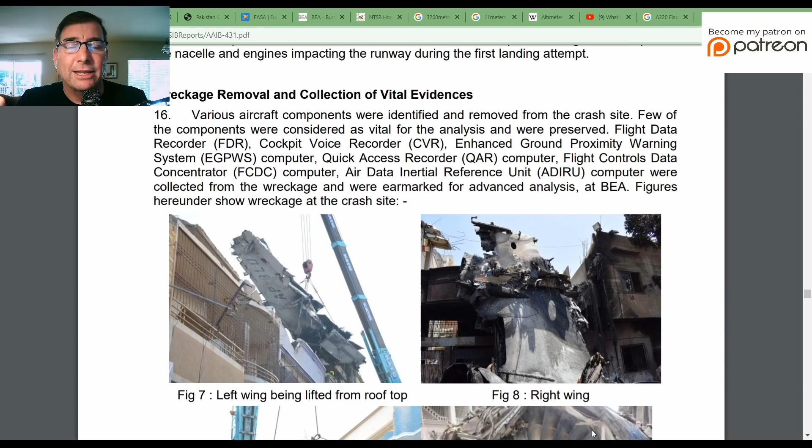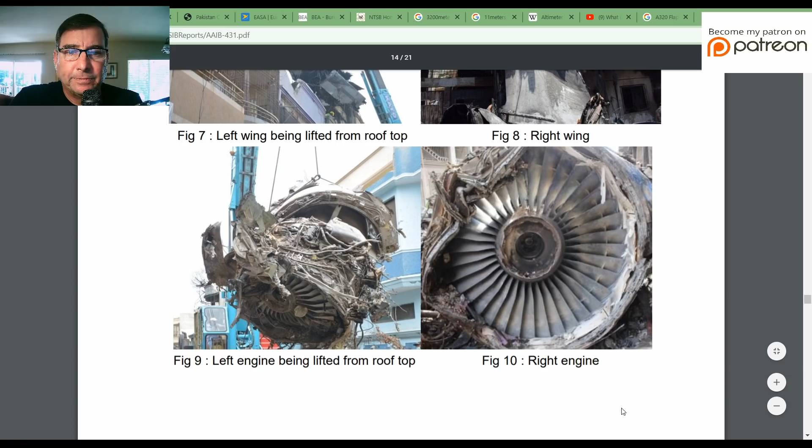Here's the left wing, which was located on the rooftop, the right wing section down in the alley, the left engine being removed from the rooftop, and the right engine down in the alley. You can look at that right engine and see very little damage to the high bypass fan section, indicating little or no power to these engines by the time they hit the ground, corroborating the fact that both engines failed.

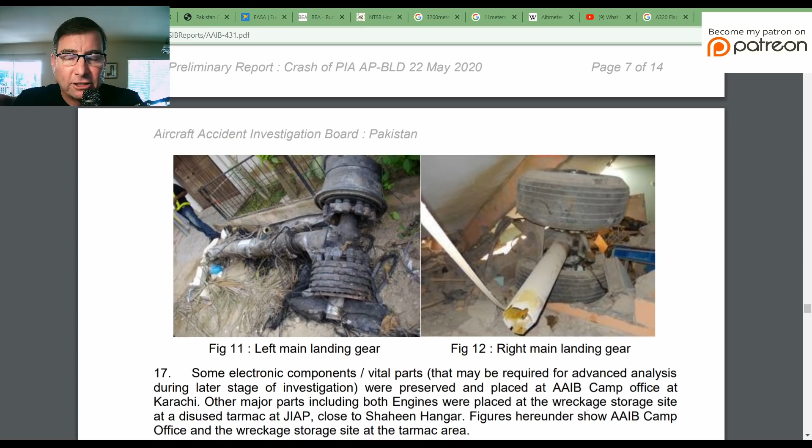The left main landing gear and the right main landing gear, broken off of the airplane, is further evidence that this landing gear was in the extended position. Remember the closed circuit TV footage of the actual crash into these buildings indicated, you could visually see, that the gear was in fact down, and it appears at this time that the gear came down normally.

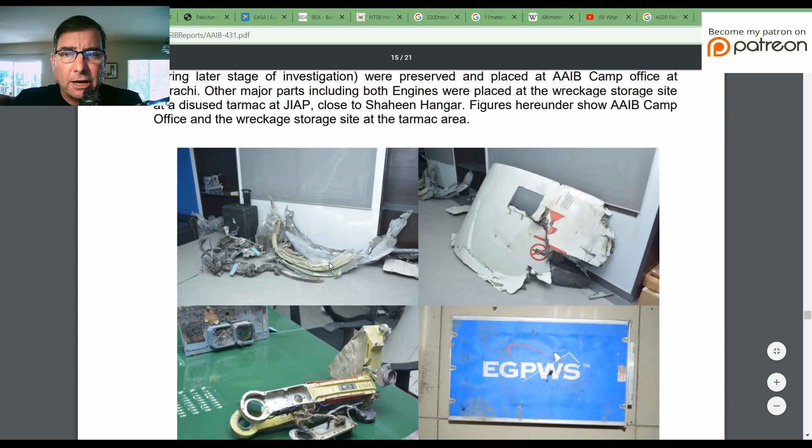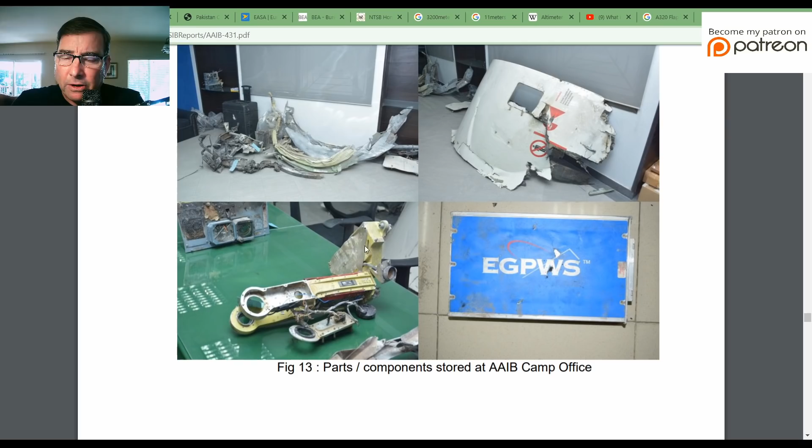So they were able to secure the vital parts of this accident. That looks to be an engine cowling piece, and I believe this is the trimmable portion of the horizontal stabilizer, the arm that moves to trim the horizontal stab. I believe that's the main spar mount, perhaps, mounting of the horizontal stab. And of course the enhanced GPWS, that's just the cover to the box.

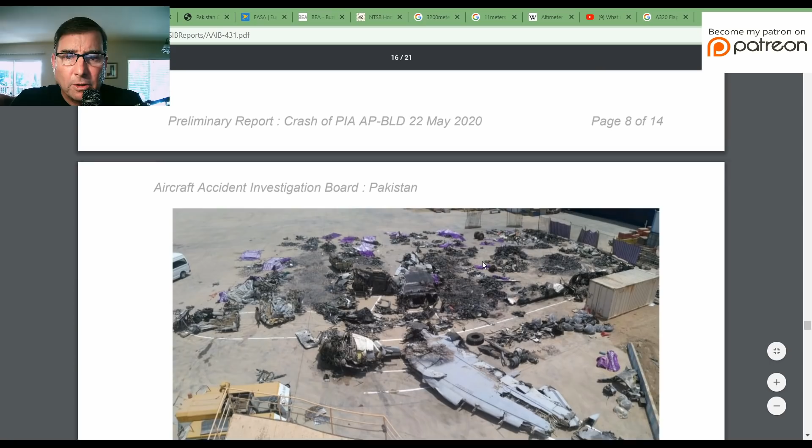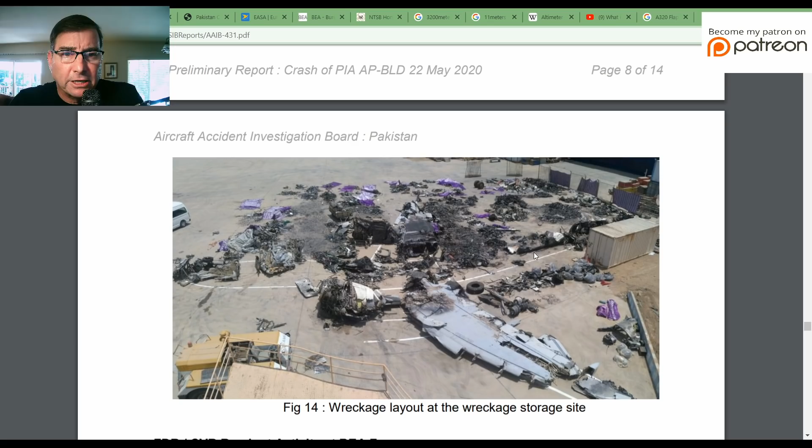Here's where investigators try to lay out all the bits and pieces and put this puzzle back together. On the left side of the photograph is the cockpit area, the front of the aircraft. Here's the left wing in the lower portion of the photograph, right wing and tail section back here. Heavy post-crash fire after crashing.

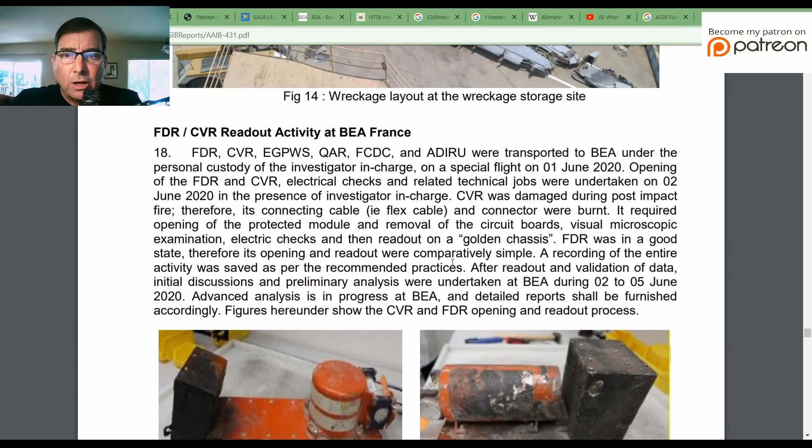So they were able to get all this critical data over to France, to the Bureau of Investigations and Analysis. These folks are experts at this work. Here's the flight data recorder, here's the cockpit voice recorder. There was a lot of misinformation swirling around about the status of these components, but they got them and the data is fine, with one notable exception we'll explain in a minute.

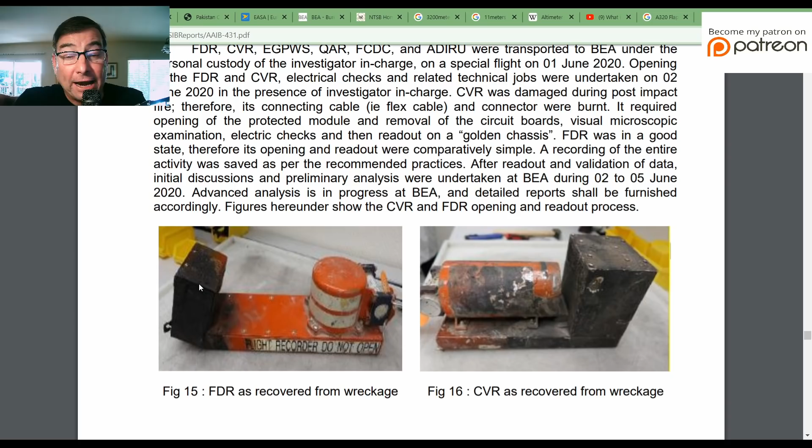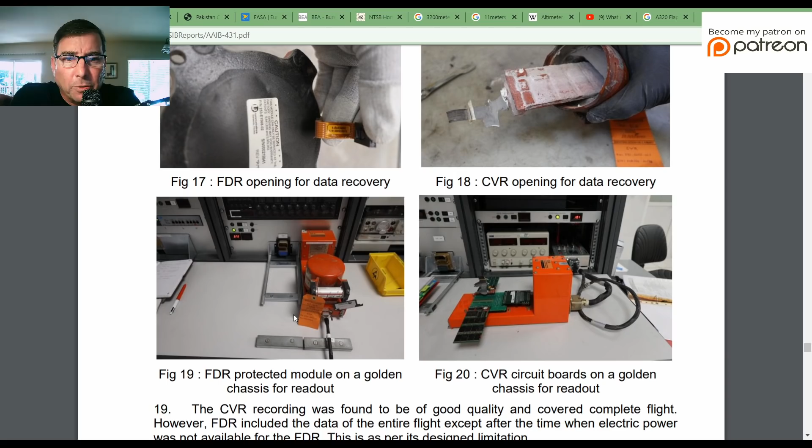This flight data recorder is going to hold the key to this entire investigation, as this boils down to a human factors event. Here they're opening the flight data recorder, getting the circuit board out of it, and then they hook up the circuit board to the computer and read the data off of the circuit boards.

Preliminary findings: the reported weather at the origin, en route, and at the destination of the flight. In other words, the weather was not a factor. This next sentence says a lot. This next sentence is the beginning of the end of the whole sequence of events, the whole chain, beginning to thread the chain of events through the Swiss cheese.

On 22 May 2020, 8303 took off from Lahore. Departure from Lahore and cruising flight were uneventful. The crew did not follow standard callouts and did not observe CRM, crew resource management aspects, during most parts of the flight.

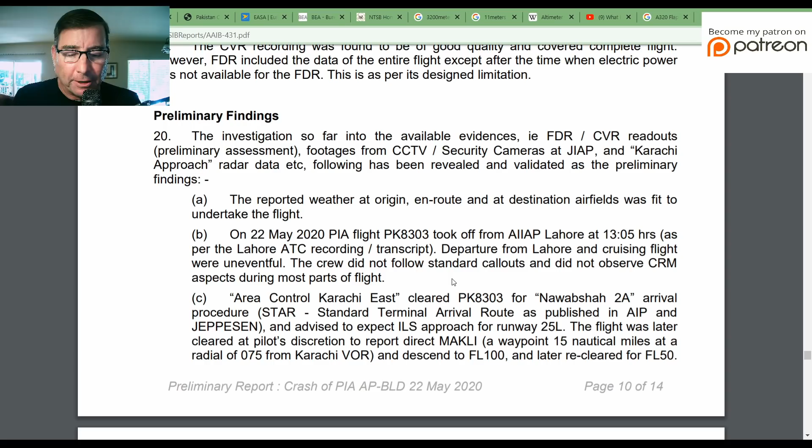So there's something on the CVR recorder that investigators are flagging right away. What was the conversation going on in that cockpit? Were there some major distractions going on in that cockpit? How was this crew working together as a team, like you're supposed to do with proper CRM, crew resource management?

Paragraph C: Area Control Karachi East, that's the en route air traffic controller, cleared PK 8303 for the Nawabshah 2A arrival. Not sure on that pronunciation. The Nawabshah 2A arrival is a standard terminal arrival procedure into Karachi, and they were advised to expect the ILS, the Instrument Landing System, for runway 25 left.

Even though pilots are flying visual approaches, they are still cleared an instrument approach, and pilots typically use that ILS approach as a backup to their visual approach to, A, make sure they're landing on the correct runway, and B, make sure they're descending at the correct descent rate for the runway.

The flight was later cleared at pilot's discretion to report directly to MAKLI, descend to 10,000 feet, and later recleared to 5,000 feet. The aircraft changed over to Karachi approach control, going from the en route controller to the approach controller, and was cleared to descend further to 3,000 feet by the time it reaches MAKLI.

Let's take a look at this. Here's the arrival, the Nawabshah 2A, which starts over the Nawabshah VOR. 2A takes this branch here to this waypoint, and then aims you straight on into MAKLI, which is about 15 DME or so off the end of the runway. Notice there's a little holding pattern there at MAKLI.

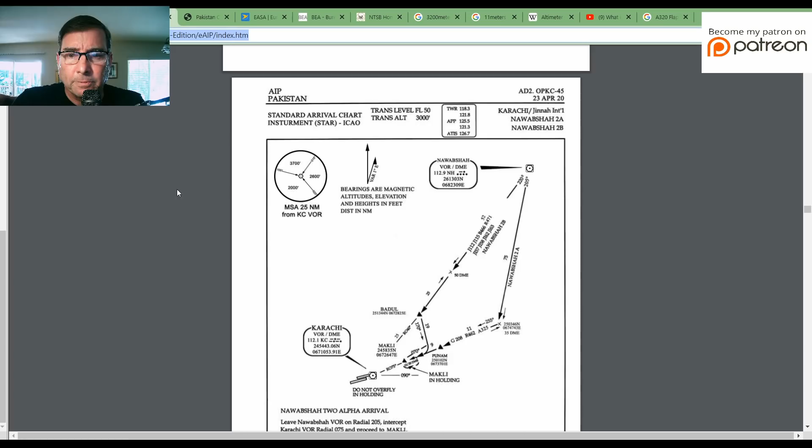Also, here's your transition flight level of 50, or 5,000 feet, and a transition altitude of 3,000 feet. Again, in other parts of the world, your transition altitude isn't always flight level 180, it varies around the world. That's the altitude at which you change over from the QNH, the home local airport altimeter setting, to a standard altimeter setting of 2992, or internationally 1013 hectopascals.

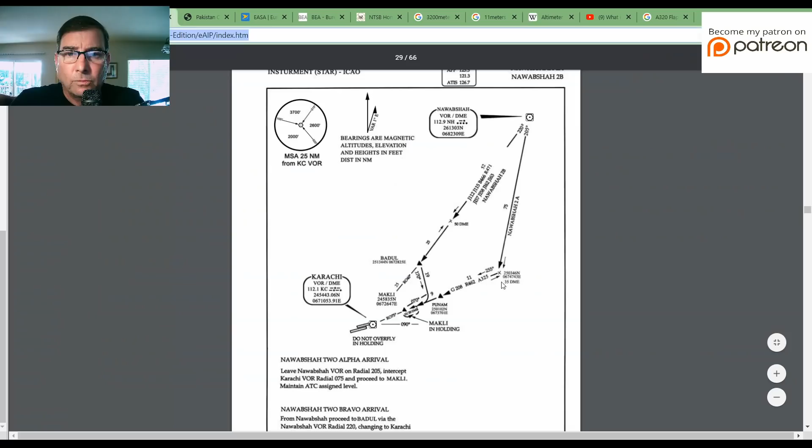But this crew elected to just come bombing straight on in. Crossing MAKLI at 3,000 feet should set you up well to intercept the glide slope from below, much easier than intercepting it from above, like this crew was attempting to do. We'll look at this profile here in a second.

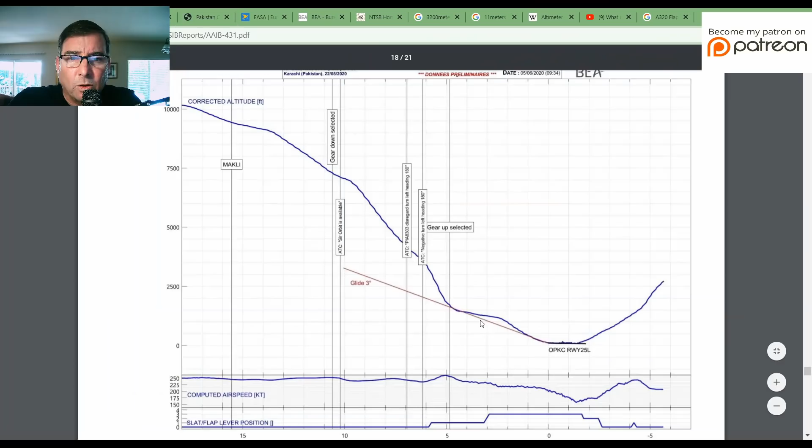Paragraph D: the aircraft ended up higher than the required descent profile. Yeah, way higher. At MAKLI, the aircraft was at 9,780 feet. If you're coming straight in to Karachi, you need to be at MAKLI at 3,000 feet, so they were fully 6,000 feet or more higher than they were supposed to be.

At 245 knots indicated airspeed, they needed to be down to closer to 180 knots indicated airspeed by this point. In order to manage the descent and lose the additional height, open descent, this is an Airbus term, equivalent to flight level change in a Boeing product, mode was selected via the flight control unit.

What I call the mode control panel, but I'll show you this in a second. Both autopilots were disengaged and the speed brakes were extended. So whoever's flying the aircraft is just disengaging the autopilot, opening the descent, and trying to jam the nose down to intercept the glide slope. Let's take a closer look at what this open descent means.

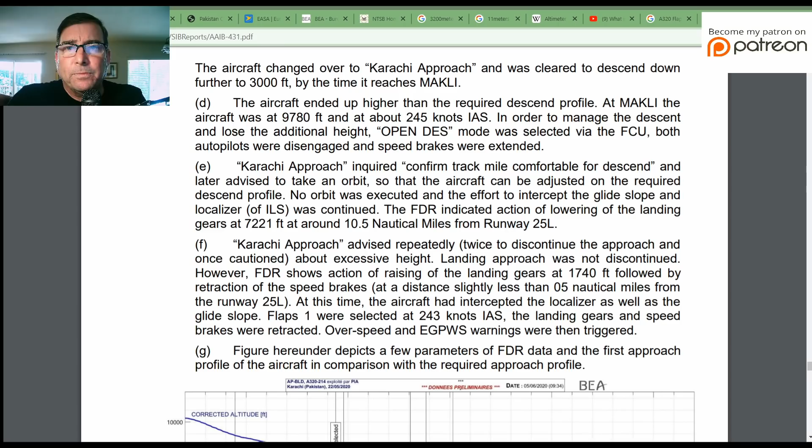The flight data recorder indicated lowering of the landing gear at 7,221 feet, around 10.5 nautical miles from runway 25 left. So the crew did initially lower the landing gear. At that time, airspeed was about 250 knots. Remember, the Airbus has a 250 knot safety limit preventing gear extension above that speed. It's not clear in this report if that was the case. All we know is the gear handle was selected to the down position.

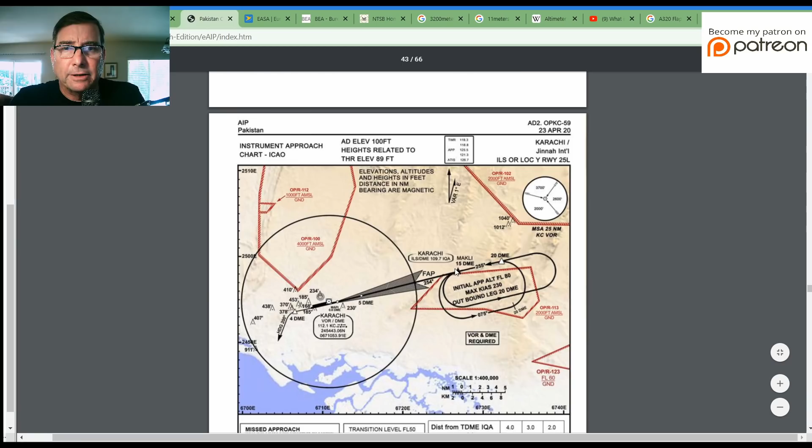Back on the ILS for 25 left instrument approach, this is the holding pattern the air traffic controller is referencing. Even though his phrasing sounds a little unconventional, he's trying to get the crew to enter this holding pattern to slow down and descend. But the crew disregarded those instructions.

Karachi approach advised repeatedly, twice, to discontinue the approach, and once cautioned about excessive height. The landing approach was not discontinued. They just continued bombing on in.

However, the flight data recorder shows the gear being raised at 1,740 feet, followed by retraction of the speed brakes at slightly less than 5 nautical miles from runway 25 left. So massive confusion here. What's going on? They go to lower the gear. It's not clear whether they got the gear down or not, or whether the safety valve prevented it from lowering. And then they go to retract the gear. This indicates massive confusion in the cockpit.

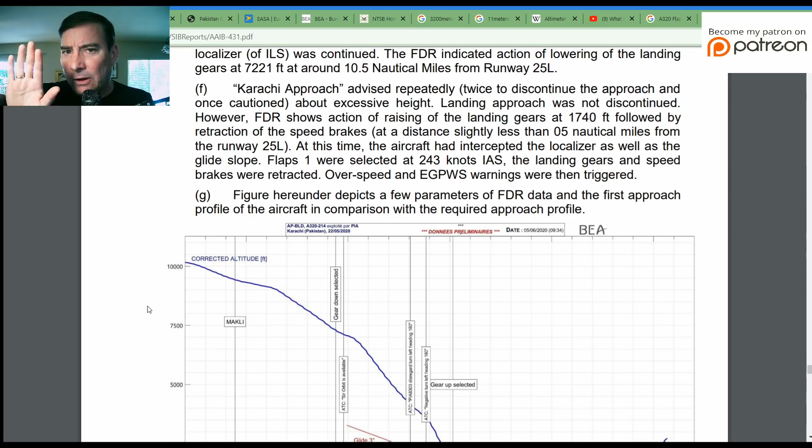Are they talking to each other? Is one pilot thinking they're going to land, and another thinking it's time to go around? They're clearly not on the same sheet of music at all. It will all become clear once we interpret the cockpit voice recorder. We need to hear the conversation inside the cockpit.

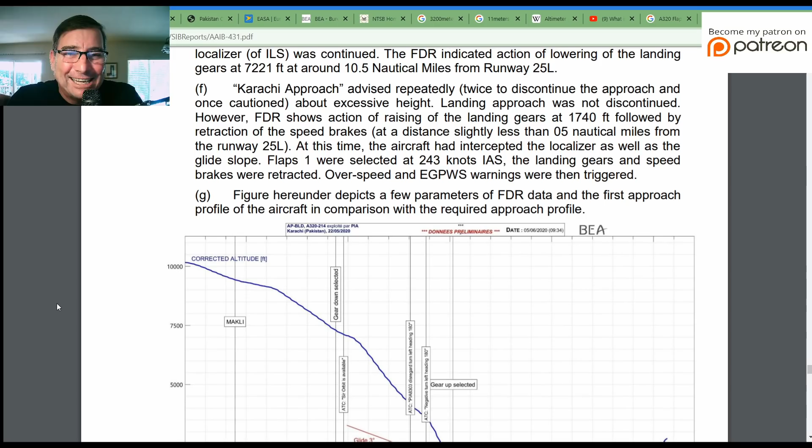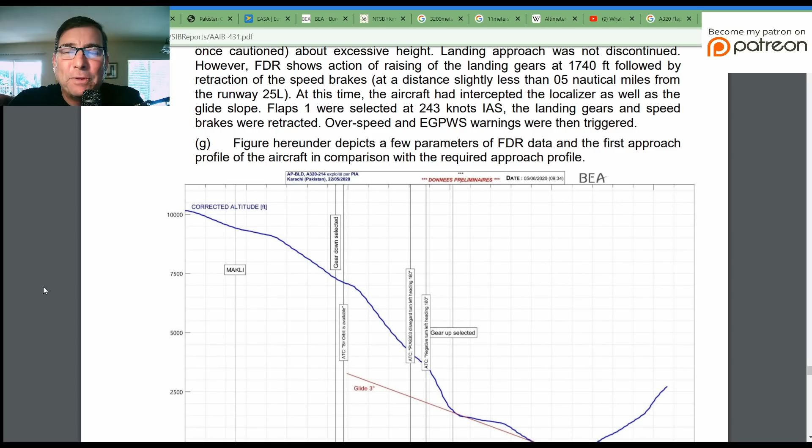At this time, the aircraft has intercepted the localizer as well as the glide slope. Flaps 1 are selected at 243 knots indicated airspeed. They need to be getting down closer to approach speed at this time, well over 100 knots too fast. The landing gear and speed brakes were retracted. Overspeed and EGPWS warnings were then triggered.

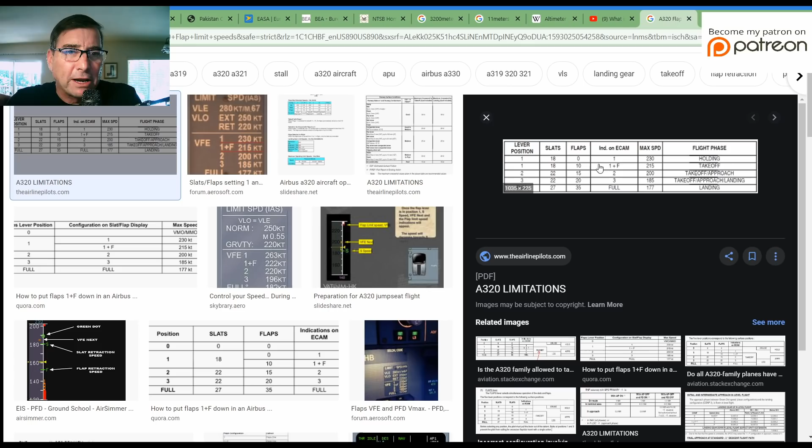So they're attempting... let's talk about that. The warning you're hearing at this point: gear's up, you're getting the too-low-gear warning, and you're overspeeding the flaps. Here's the flap limits for the Airbus A320. Flaps 1, 230 knots. What were they at? 245, 243 knots, and looking at the profile, they may have been even faster. Here's the placard right on the instrument panel: Flaps 1, 230 knots. This is also indicated right on your airspeed tape.

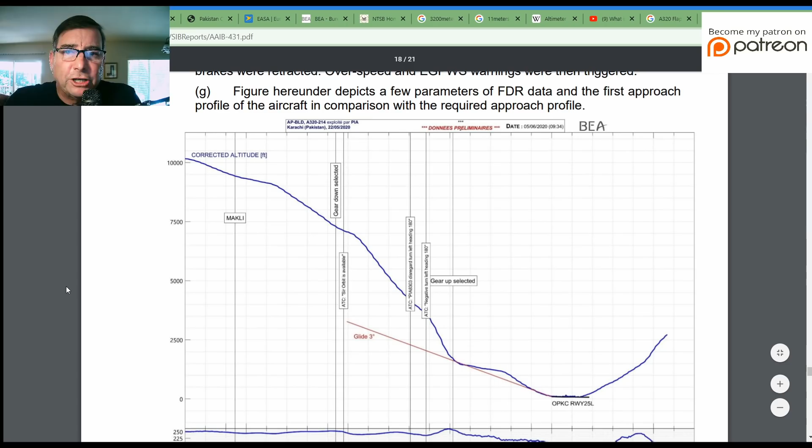Paragraph G: the figure depicts a few parameters from the flight data recorder of the first approach profile compared with the required approach profile. Here is the actual desired 3-degree glide path, which you intercept. You level off about 3,000 feet at MAKLI, intercept it from below, and then come on down. Here at MAKLI, they're over 9,000, 9,500 feet, where they should be at 3,000 feet.

Look at the airspeed, 250 knots steady, and here's the spike where they got about 7,000 feet per minute vertical rate of descent, spiking the airspeed up to over 260 knots. At the same time, they're trying to lower the flaps to 1.

So coming on in here at just under 7,500 feet, the landing gear is selected down. Somebody on the crew is trying to lower the gear and get ready for landing.

Just after that, ATC is telling them to take a turn in the holding pattern. Here again, ATC tells the flight crew to abandon the approach and turn left to heading 180. But whoever's flying the aircraft, we still don't know if it's the captain or the first officer. A final dive is made for the glide slope, and this is where they get 260 knots, 7,000 feet per minute. And just as they hit the glide slope, somebody selects the gear up.

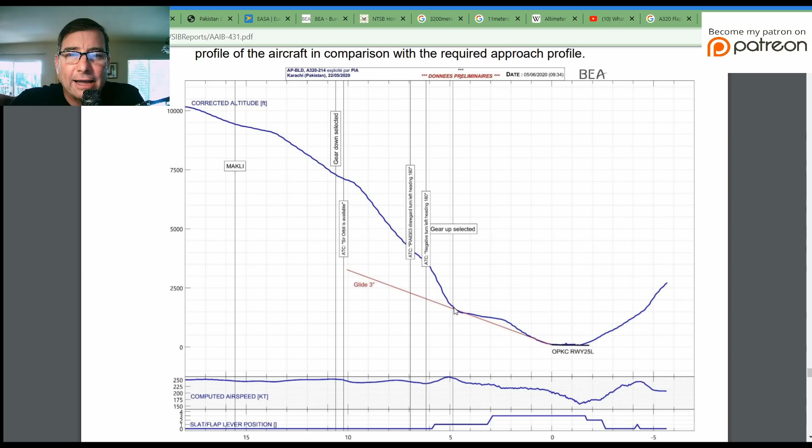So again, are they going to go around or are they going to land? There's massive confusion in the cockpit.

The flap slat lever position is moved all the way out to the flap slat 3 position. Whether the flaps themselves actually made it out to the flaps 3 position remains to be seen on the flight data recorder.

Well, I'm not sure if that's true — if the flight data recorder only records the position of the handle or the actual position of the flaps, because the flaps have a blow-up capability. If you lower the flaps at too high an airspeed, not only do you get an overspeed warning, but the flaps have built-in blow-up capability which prevents damage by blowing back rather than extending fully. Regardless, it looks like the crew at some point got flaps 3 on the lever position while continuing this approach at way too high an airspeed, without the landing gear extended, into runway 25 left.

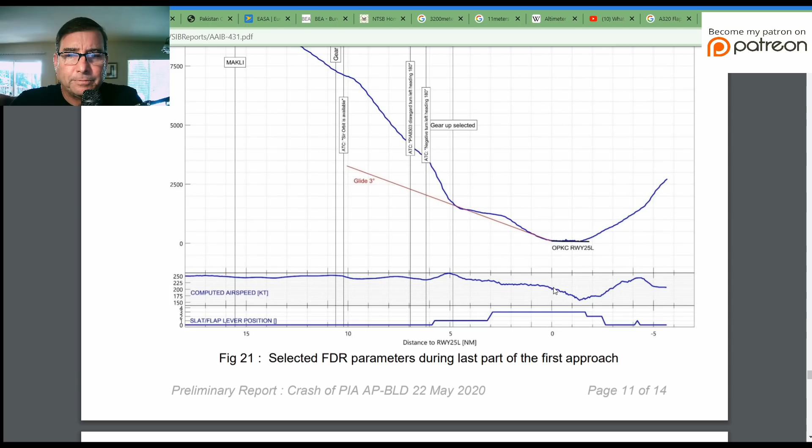Paragraph H. Now a whole other series of confusion erupts with the air traffic control of Flight PIA8303. Since the approach to land was continued, Karachi approach—remember you've got the en route controller, the approach controller, and then the tower controller, or as they call it, aerodrome control here in this report.

Since the approach to land was continued, Karachi approach, instead of changing the aircraft over to aerodrome control tower, instead sought telephonic landing clearance from aerodrome control. The aerodrome control conveyed a landing clearance of the aircraft without observing the abnormality that the landing gear was not extended, to Karachi approach. Subsequently, Karachi approach cleared the aircraft to land.

Though ATC can maybe help you in the event that you have an improper landing configuration for your aircraft, it's still ultimately up to the captain to make all this happen.

Paragraph I. At 500 feet, the flight data recorder indicates that the landing gear was retracted, slat flap configuration 3—that's per the handle—airspeed 220 knots indicated airspeed.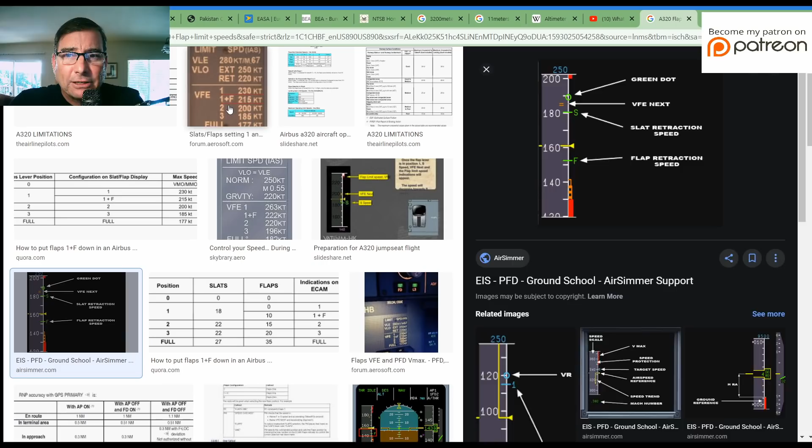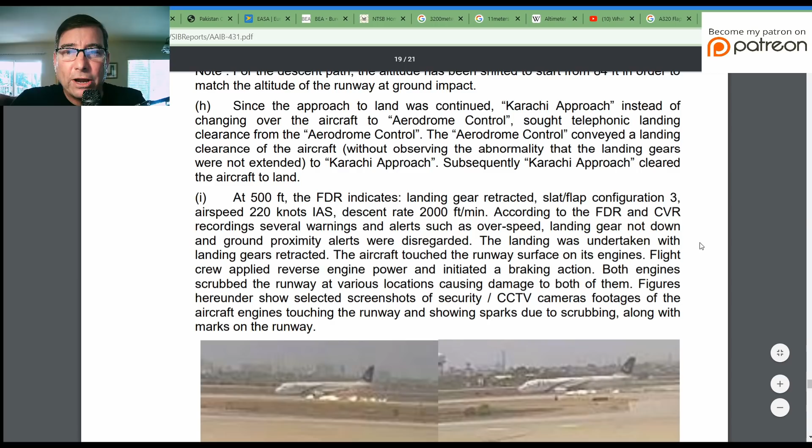Let's go to flaps 3. The flaps 3 speed limit is 185 knots. So they're well overspeeding the flaps. So they're getting plenty of warnings for flaps and gear.

And a descent rate of 2,000 feet per minute. So at 500 feet, they should be on approach speed about 120 knots. Instead, they're doing 220 knots, so a full 100 knots too fast.

And a descent rate of 2,000 feet per minute at 500 feet—your maximum allowed rate of descent should be more on the order of 1,000 feet per minute. So fully twice as fast of a descent rate, all caused by the high airspeed. And of course, the completely wrong configuration for the aircraft.

As discussed in prior updates, stabilized approach requirements require that you have your aircraft stabilized on approach speed and proper configuration by 1,000 feet, with your airspeed under control no later than 500 feet above the ground.

According to the flight data recorder and cockpit voice recorders, several warnings and alerts such as overspeed, landing gear not down, and ground proximity alerts were disregarded. The landing was undertaken with the landing gear retracted. The aircraft touched down on the runway surface on its engines.

Now this gets really ugly. Flight crew applied reverse engine power and initiated a braking action. This indicates to me that the crew was completely caught by surprise that the gear was retracted. Whoever was flying the airplane fully expected the landing gear to be down.

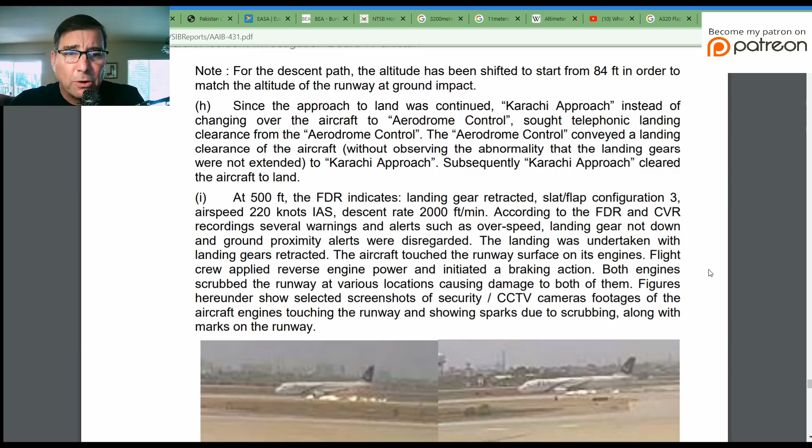Both engines scrubbed the runway at various locations—we talked about that in a previous update—causing damage to both of them. The figures hereunder show selected screenshots of security CCTV camera footage of the aircraft engines touching down the runway and showing sparks due to scrubbing along the marks on the runway. So there's the actual evidence that folks were looking for of this happening.

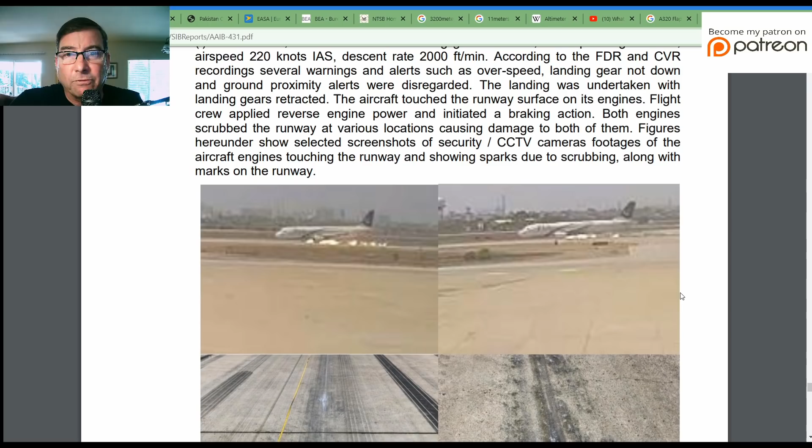And we talked about these scrape marks before. This will damage the engines.

Paragraph J. Aerodrome control, that's the control tower, observed the scrubbing of the engines with the runway and did not convey this abnormality to the aircraft. Normally you'd be on the radio communicating with them all the way down, but because of some kind of an ATC mess-up, the tower never got into direct contact with this flight.

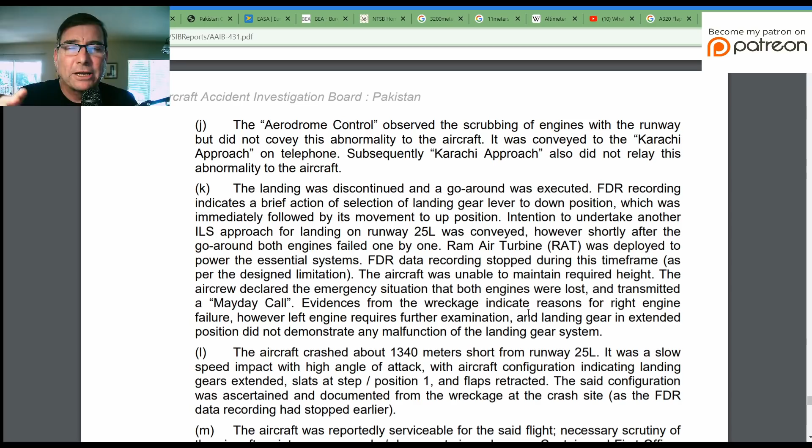They were using the telephone to Karachi approach. It was conveyed to Karachi approach on telephone. Subsequently, Karachi approach also did not relay this abnormality to the aircraft. Things were just snowballing out of control too fast at this point.

Okay, paragraph K. Here's where they seal their fate. This is where I think they were caught by surprise that the landing gear was up. The landing was discontinued and a go-around was executed.

You cannot begin to do a go-around once you've applied reverse thrust and/or the ground spoilers have come up on the wings. Now there's no indication as to the status of the ground spoilers in this report, but it's much too late to do a go-around at this point, especially after you've already hit the ground on the engines.

Again, this indicates to me that they were totally surprised by all of this, and they're just simply reacting. Yes, certainly it would have been safer and better for them to stay on the ground at this time. The landing was discontinued and a go-around was executed.

The flight data recording indicates a brief action of selecting the landing gear lever to the down position, which was immediately followed by its movement to the up position. So whoever's not flying the aircraft is just completely confused and doesn't know what to do with the landing gear at this point. Intention to undertake another ILS approach for landing on runway 25 left was conveyed.

However, shortly after the go-around, both engines failed one at a time. The ram air turbine, the RAT, was deployed to power the essential systems.

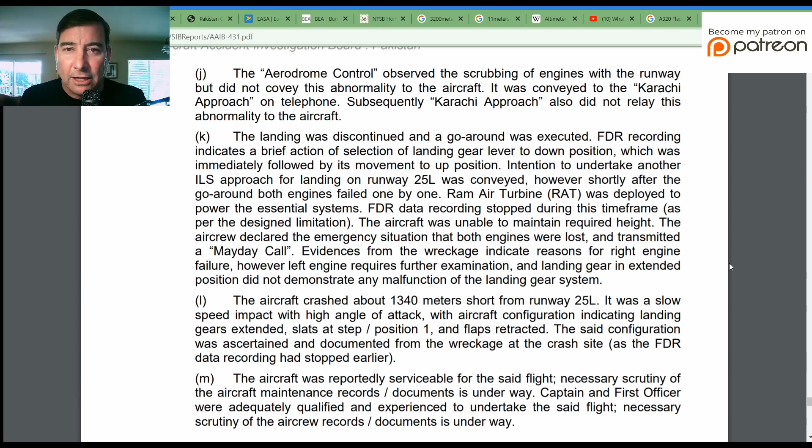It appears that the right engine failed because of the damage it sustained hitting the runway. The left engine, what caused that engine to fail at this time, is still unknown, which brings up the question: in handling an engine failure, there is the possibility that the crew could have shut down unintentionally the one remaining good engine. It's also entirely possible that the left engine failed due to the same thing the right engine failed from, damage caused by hitting the runway.

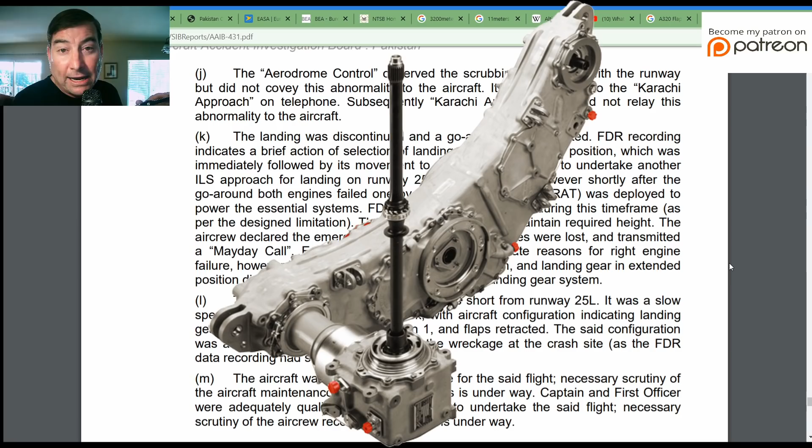Remember, in previous updates, we talked about the accessory drive gearbox being mounted on the bottom of that engine, and if you smash it onto the runway, you're going to smash that accessory drive gearbox, which contains all the vital functions of things like fuel control unit, hydraulic power, electric power, and everything else to keep this engine running.

Paragraph L. The aircraft crashed about 1,340 meters short of runway 25 left. It was a slow speed impact with a high angle of attack with aircraft configuration indicating landing gear extended, slats at step or position 1, and flaps retracted. This configuration was ascertained and documented from the wreckage at the crash site because the FDR quit recording.

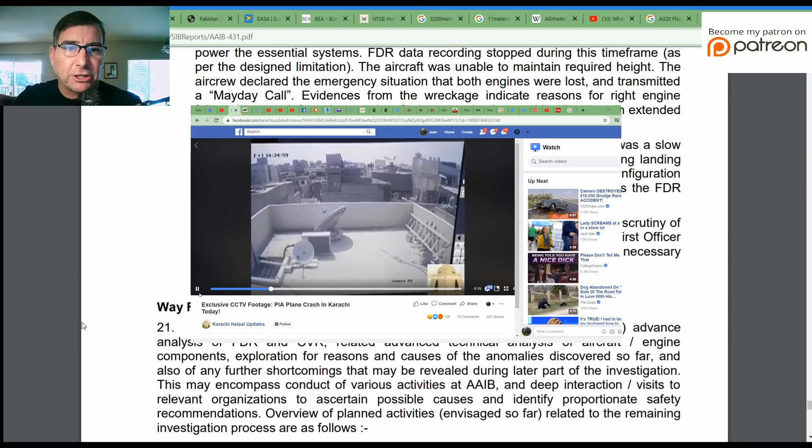Now, this Airbus, under normal law, with all the electrical system working, you cannot stall an Airbus. However, under alternate law and or direct law, which investigators are going to find out that this aircraft was in because of the emergency power configuration, yes, you can very easily stall an Airbus aircraft. And at flaps 1 and 150 knots, I bet investigators are going to find out that that crew ended up stalling that aircraft into those buildings.

But at that point, what are you going to do? The aircraft was reportedly serviceable for the said flight, and necessary scrutiny of aircraft maintenance records and documentation is underway. The captain and first officer were adequately qualified and experienced to undertake the said flight, necessary scrutiny of the aircrew records. Further documents are underway.

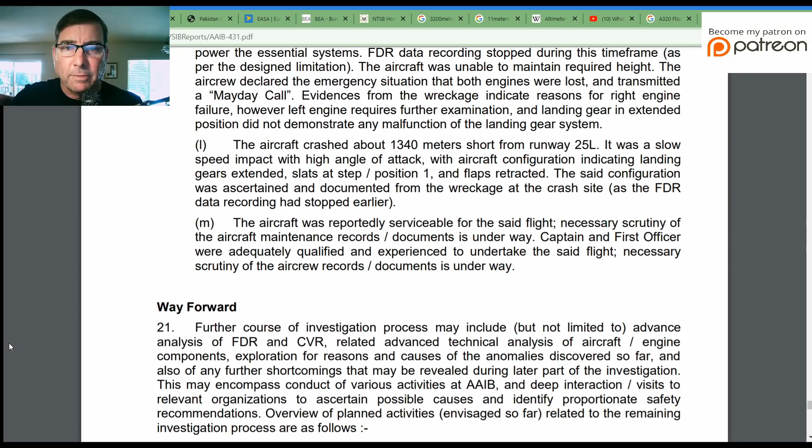So, the way forward, where do investigators go from here? They're going to continue to extract the data from the flight data recorders and the cockpit voice recorder. We've got to hear the whole conversation on the cockpit voice recorder all the way back to the beginning of this flight, if that's possible. That is going to tell the story.

They're also looking at the fact that this aircraft was grounded for 46 days for COVID-19, from 22 March to 6 May, but this aircraft did fly after 6 May before this accident. I don't think there's going to be much to learn from there.

And most importantly, they're going to do the critical analysis of the performance of pilots by Pakistan International Airlines for stabilized approaches, which we've been beaten on continuously here, the use of flight data monitoring analysis tools, crew resource management, supervision of simulator sessions, and related regulatory oversight by the Directorate of Flight Standards. Also, they need to carefully assess the safety management system at Pakistan International Airlines, the state safety program, and the CAA for safety oversight of the entire operation, and evaluation of the safety and quality management system over at Pakistan International Airlines, because the folks in Pakistan deserve better.